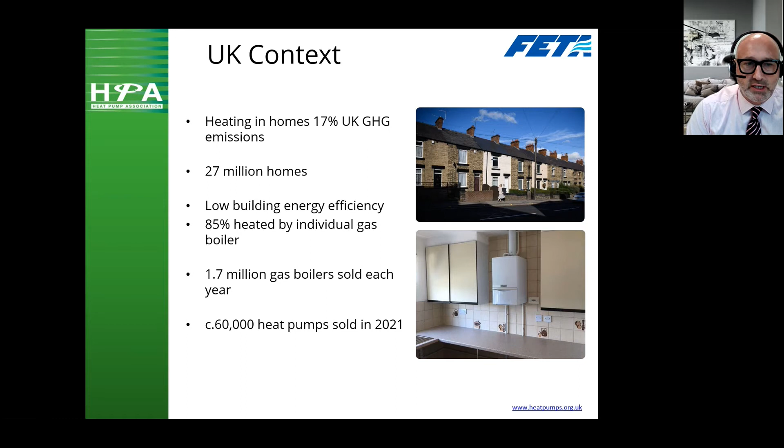So what has been pleasing is that we have had some recent policy announcements by the UK government. And in 2019, the UK government was the first country in the world to actually promote and actually, in policy, in Parliament, set a net zero target of 2050.

And following on from that, in November 2020, the Prime Minister announced a target of 600,000 heat pumps, part of the Green Industrial Revolution. If we're going to reach that net zero target by 2050, then we need to be installing that many by 2028 and around about 1 million by 2030. So you can see from 60,000 heat pumps, we've got a long way to go.

One of the key changes for us in the UK market is last October, the government published what's called the Heat and Buildings Strategy. And in that document, there was a clear commitment demonstrated to use heat pumps as a low carbon solution in our buildings if we're going to achieve the net zero target. And we've never had that before.

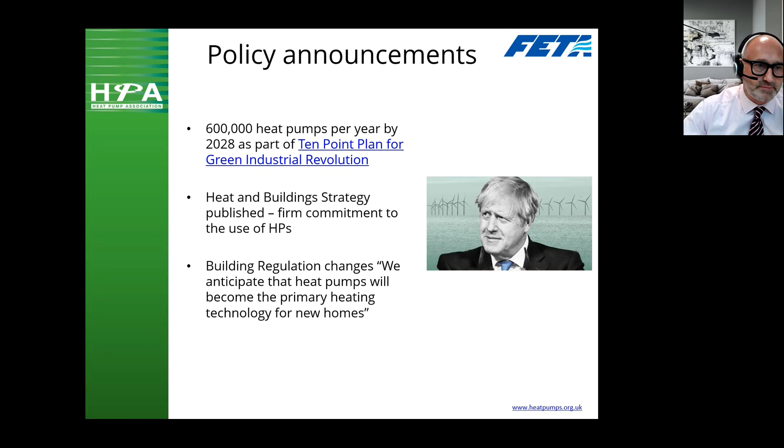So why heat pumps? I don't have to tell a heat pump conference how heat pumps work. We all know they're a renewable energy, a low carbon energy. For every kilowatt of electricity you use to run it, you can get 3 to 4 kilowatts of energy out of it.

What is a big difference in the UK is that as a country, we've been pretty successful at decarbonising the generation of electricity. So over 10 years ago, 40% of our electricity was generated from coal, and today that is basically zero. And some of that has been exchanged to natural gas, but also in the last 10 years we've seen a massive increase in offshore wind, which represents now around about 35 to 40% of our electricity generation,

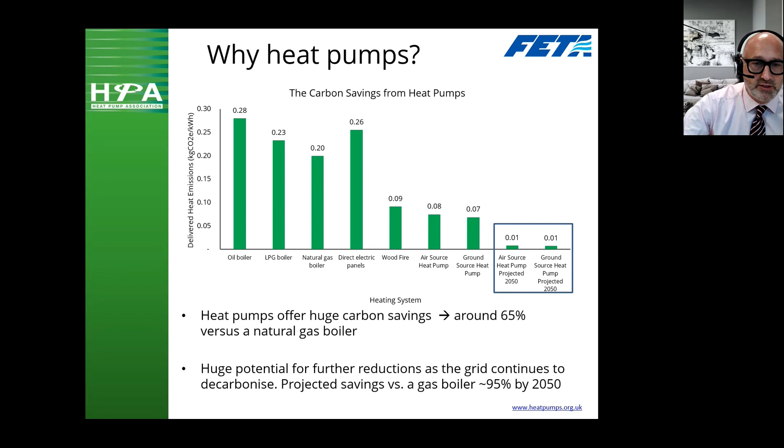But what we can do in the UK is learn key lessons from these countries to increase deployment of the heat pumps. And that's great being here today to share that with you. And hopefully we can all learn together to actually increase the penetration of heat pumps.

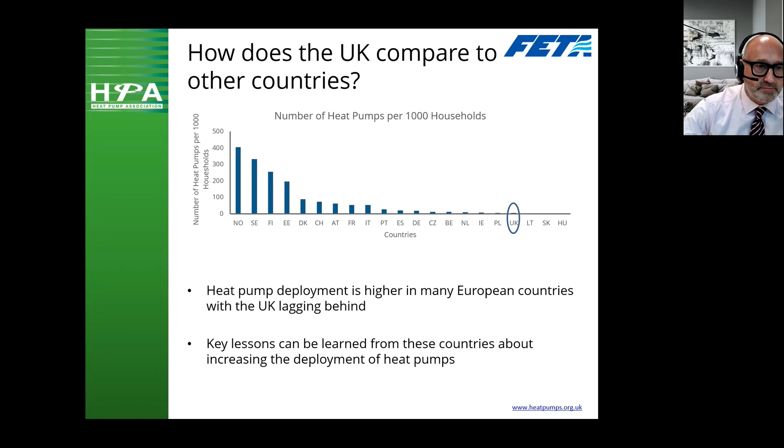achieve our carbon targets. But what we believe is with the change in the building regs that the new build houses is essential for the growth of the heat pump market over the next few years up to 2025, 2026. And this will be driven by this new building regulations. And to actually achieve these targets, then what is massively needed is an increase of retrofit in existing homes, is replacing gas boilers as they come to the end of life with a heat pump.

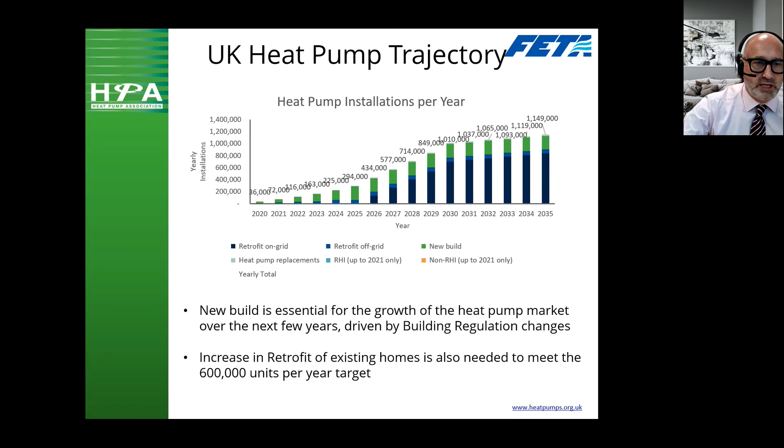But to achieve that target of the 600,000 heat pumps by 2028, there's going to be additional policy in place to achieve that. But the positive is that with new build, at least up to 2025, we will see a massive growth in heat pump deployment in those buildings.

So why new builds? Okay, so independent research shows that heat pumps are already cost comparable with gas boilers in new build. And putting heat pumps in new build homes avoids the need for costly retrofit at a later date, which is a real positive. We shouldn't be building homes now that we need to retrofit later to achieve net zero targets. And it's easier to increase the deployment of low carbon heating in new build compared to the retrofit market.

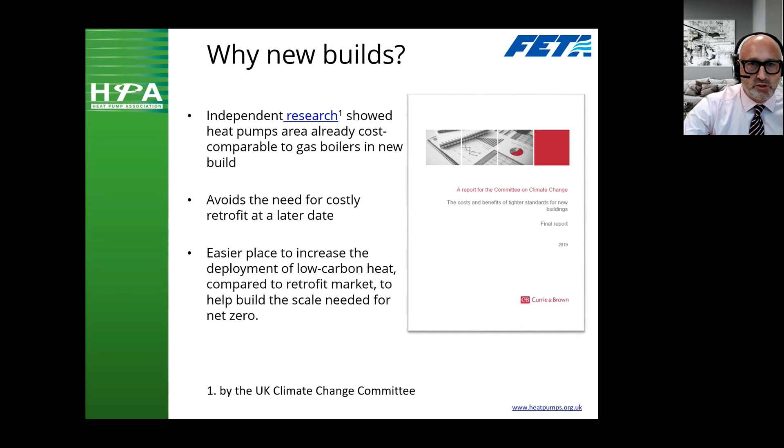And it helps build scale needed for net zero. It develops the supply chain, it develops the need for training installers, and that's what we need to get that going to actually move on to the biggest challenge, is the 27 million homes we need to retrofit from the mid 2020s up to into the 2030s.

So, as I mentioned, the building regulations in the UK are being published this year in June, this month. And as I said earlier, we anticipate that heat pumps will become the primary heating technology for new homes. So in 2021, when it was published, the interim uplift will produce 31% less CO2 emissions compared to current standards. And heat pumps is a really, really good way of achieving this, okay, and very simply.

And then from 2025, we've got what's called the Future Homes Standard, which will come in. And this will ensure that the average home will produce 75% less CO2 emissions than current standards today. And by that time, heat pumps become critical to achieve that, and gas boilers will no longer be used.

And the biggest change, and which we've been promoting as a heat pump industry and the Heat Pump Association, and one of our key messages, is to lower the flow temperature. And this is a real win for us in new build. So where a wet heating system is being newly installed, the system should be sized to a maximum flow temperature of 55 degrees or lower. So even if a heating system which isn't a heat pump goes into a new build, it will mean that it's heat pump ready

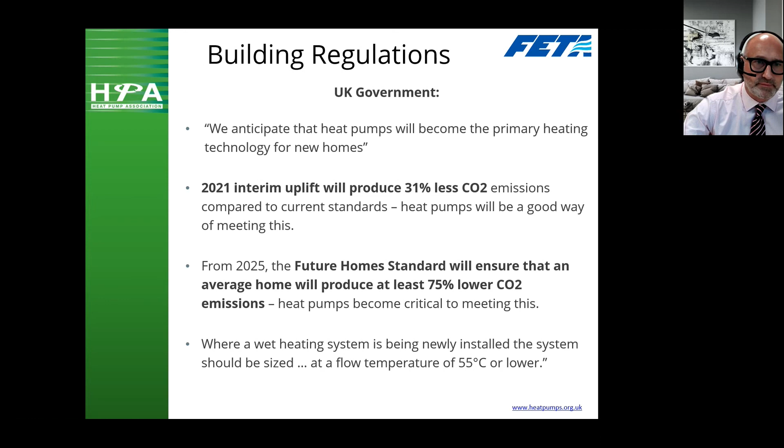So the retrofit upfront costs are a big challenge to us. Gas boilers are, because it's an established market in the UK, the majority of gas boilers installed in the UK are actually manufactured in the UK. I would say 90% of gas boilers installed in the UK are manufactured in the UK.

So because of that, and being an established market, and over 130,000 gas installers to install them, means that the costs are very competitive compared to heat pumps. And currently heat pump installers are only around about 4,000. So this is a big challenge.

The government recognises this, and within the Heat and Buildings Strategy, they commit to try and get parity between a gas boiler and the installation of a heat pump, but also the running costs as well. Because gas, even though we've seen gas prices increase recently, gas is still relatively cheaper, a lot cheaper than electricity.

But what we have got in the UK is government funding available up to 2025 to assist in this. At the moment, that is £5,000 for an air source heat pump and £6,000 for a ground source heat pump. So that additional fund will help with the additional cost over the installation of a heat pump, which is very helpful, and we will see that will grow.

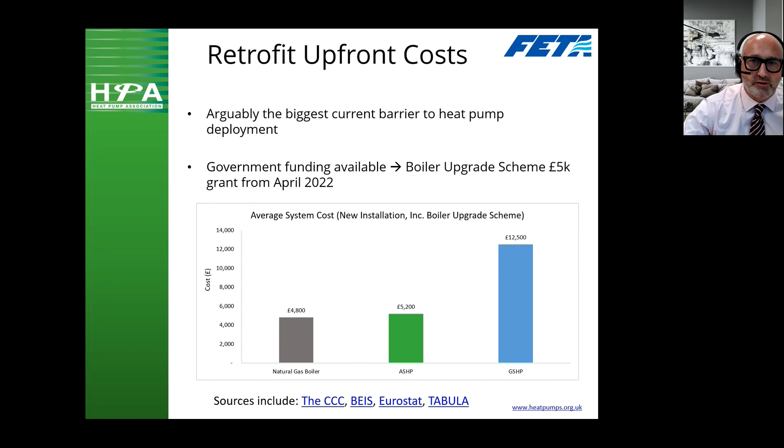It's a challenge to get down to the cost of gas boilers, but this is a good start, and we're really pleased to see the government commit with funding to 2025, which we've never had before, which also gives confidence to installers wanting to upskill to install heat pumps from gas boilers. And what we've done as a heat pump association is to try and assist installers to look at heat pumps as an option.

One of the huge barriers in the UK has been how to train and transition existing boiler installers towards heat pumps. And we recognise this. So for the HPA, the Heat Pump Association in the UK, one of the key areas of attention is developing a heat pump training course. If we're going to achieve this, we need a significant growth in heat pumps to achieve the numbers required, the 600,000.

So to achieve that 600,000, we need to train at least 26,000 installers by 2028 to meet those objectives. And currently, as I say, we have around 1,000 to 1,500 companies, which probably makes up around 4,000 installers. So again, a long way to go.

So what we've done as an association is developed our own training course, which is mapped against national educational standards in the UK. So it's an approved course, it's an approved qualification. They have to sit an exam. So it's a recognised qualification, and it means that the installer achieves a meaningful qualification. It means something to them.

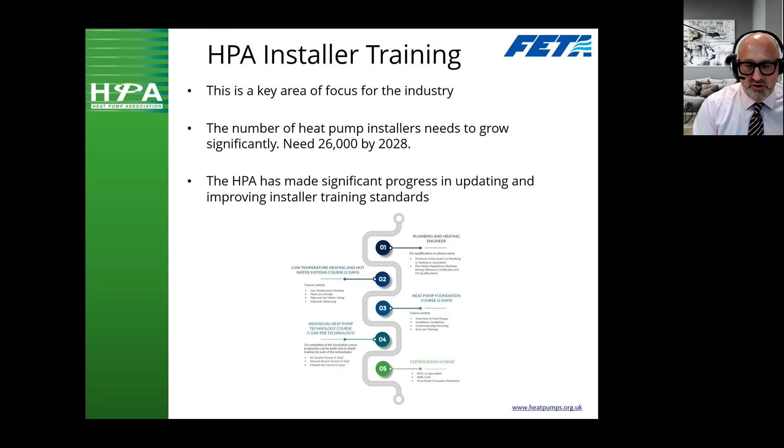So as I say, the course directly targets upskilling installers, and it was developed through HPA members, and our members represent around 96% of the manufacturing base of heat pumps, and there's a wealth of knowledge in there. So all the manufacturing members with that technical knowledge helped to develop that course.

But what all those members also have is training facilities across the UK to actually train these installers. If fully occupied, we could train up to 40,000 installers a year with our members' facilities. So the ability is there to train the installers. We just need to get the installers to book on the courses. And that is a challenge we're working on at the moment.